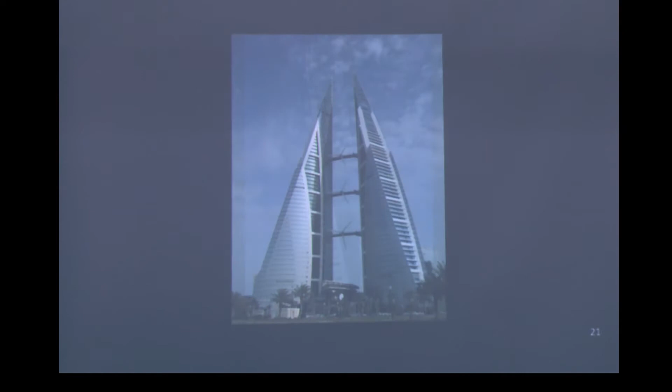But while, as mentioned earlier, our conversations are mainly focused on the condition and performance of mechanical HVAC systems because of their popularly perceived significant contribution to the current sick building issue, there are a number of other factors which require from us a more focused view with respect to the known or unknown contributions they make to the problem.

These would include building location and site planning issues, psychological impact of design quality of interior spaces, VOC emissions from materials specified and installed in built structures, dust pollutants and VOCs remaining in completed buildings as a result of construction activities, VOC emissions from various furnishing items which we bring into the buildings, lighting quality and related audio and electromagnetic emissions from light fixtures and fittings, moisture intrusion into buildings with resulting associated problems, noise emissions from various pieces of electrical and mechanical equipment installed in buildings.

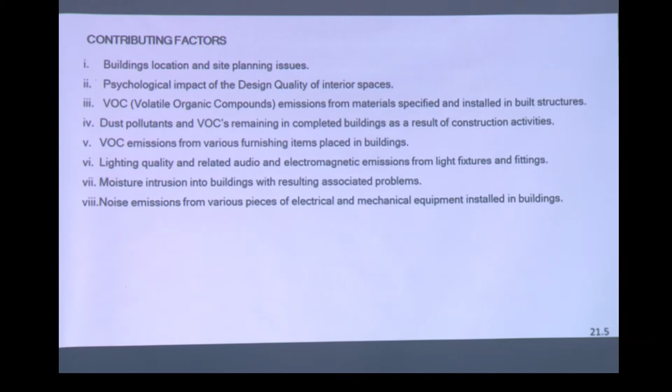What I'm trying to do here is to broaden that sort of base of what we try to talk about when we speak about environments that are not pleasant. So I'm talking more about sick buildings than about the syndrome. The building has to be sick to get to the point where you have a sick building syndrome.

Building location and site planning. These issues for concern in the early life of a building, which I call birthing pains, tend not to be given as much attention in this early stage of a project as they ought to. Sites are generally selected for every other reason except concerns for the impact of the environment that will surround them.

Naturally ventilated schools are located in close proximity to industrial plants emitting pollutants. Office buildings are located adjacent to garbage disposal sites. Hospitals are developed in areas with existing high levels of noise pollution. Sewage treatment plants are located in close proximity to tourist accommodation, and the reverse sometimes occurs.

The health issues later to be associated with these site locations are seldom given serious consideration when the sites are being selected, although it might be thought that these sorts of considerations would be high on the list of site selection criteria.

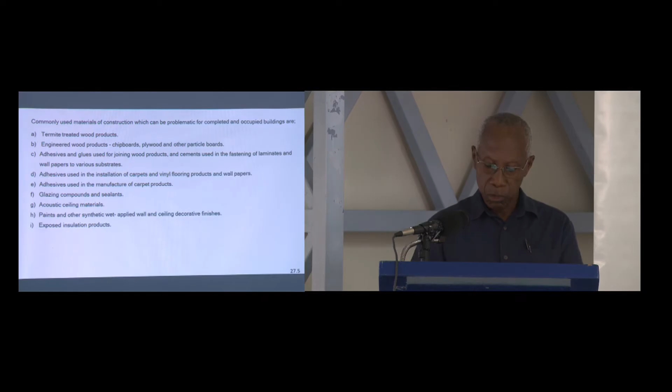As responsible architects and designers, we have to ensure that the materials we use in the construction and outfitting of buildings do not eventually release silent and invisible demons for the spatial quality of these buildings. Commonly used materials of construction which can be problematic for completed and occupied buildings are termite-treated wood products, engineered wood products, chipboards, plywood, and other particle boards, adhesives and glues used for joining wood products, and cements used in the fastening of laminates and wallpaper to various substrates.

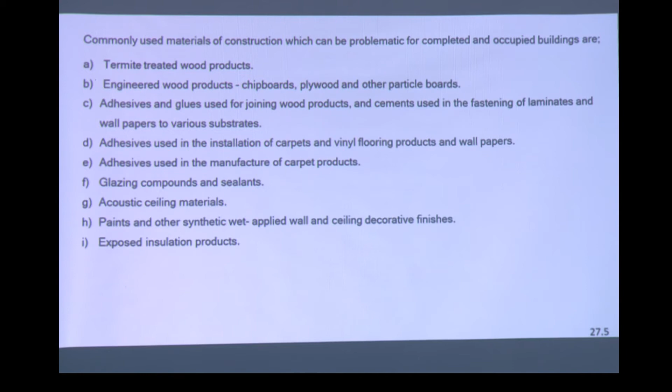Adhesives used in the installation of carpets and vinyl floor products and wallpapers. Adhesives used in the manufacture of carpet products long before they get to our installing them. Glazing compounds and sealants. Acoustic ceiling materials. Paints and other synthetic wet applied wall and ceiling decorative finishes. Exposed insulation products.

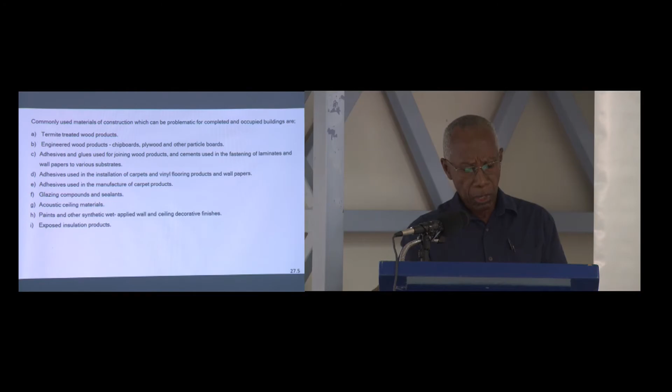Many of the problems generated by these materials and installations are usually silently released VOCs, which tend to be not immediately evident. But as architects, we are expected to be diligent in our research and in our review of the materials composition of the various products we will specify, to ensure that these silently present demons are either absent or present only in quantities below those permitted by universally recognized and accepted standards.

Some of these demons will remain lurking in the background for extended periods of time before later imposing their impact upon the users of our artificially created environments. But this possibility should not be allowed to escape our attention during product review.

Construction dust pollutants and VOCs remaining in completed buildings. During construction of buildings by traditional methods, much dust is generated by many activities, and this dust remains in spaces within the building and on various elements of the construction, which would not normally be cleaned, except the contractor has a determination to follow given specifications for cleaning, or is extremely diligent about the way he works and exhibits some pride in what he does.

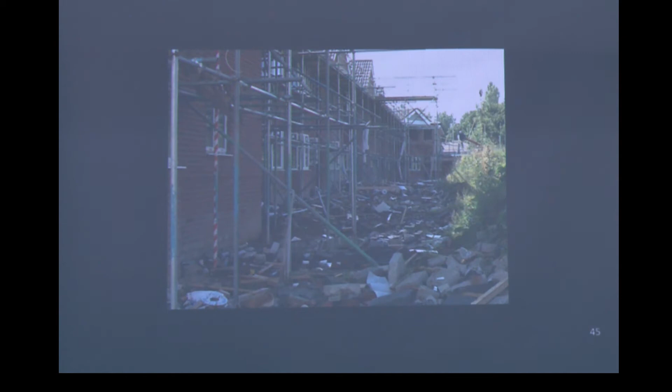Dust remains on and in all forms of that work, on the T-bar suspension systems, ceiling suspension systems, above all forms of suspended ceiling systems, and generally on all vertical and horizontal surfaces, whether exposed or hidden. This problem is generally made worse by the failure of the contractor to properly store materials being used on the job, or by inappropriate sequencing of the construction works, which causes various elements of construction to be present on the site well before they are needed for installation.

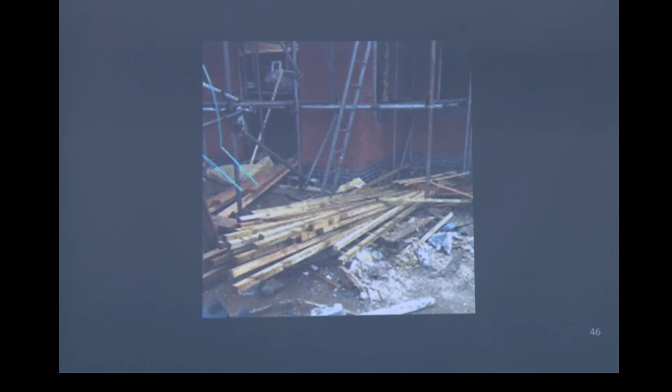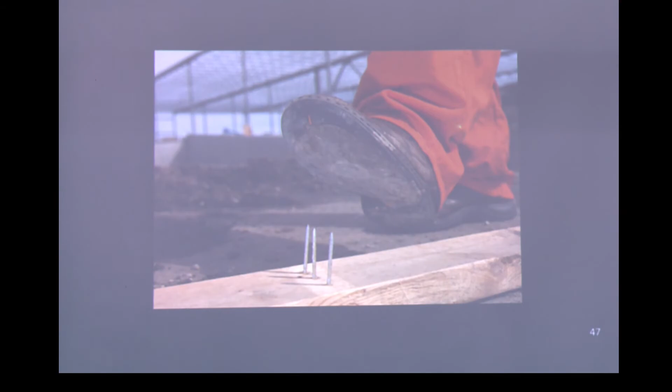The problem is worsened by the contractor's failure to carry out daily and continuous cleaning of the site, both internally and externally, to eliminate or minimize the presence of debris and dust. Other construction materials which may be responsible for the presence of VOCs in completed buildings include cleaning agents used by the contractor during various stages of the work. Various adhesives and glues routinely used in plumbing and carpentry and joinery installations. Various retarding and hardening concrete additives. Cleaning agents used in the final cleanup of the building before handover.

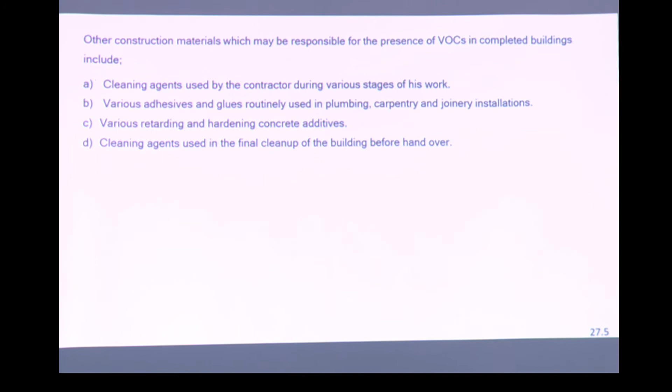The impact of many of these chemicals is seldom given any serious consideration and may tend to slip into the realm of not so important issues, particularly as the project comes to completion. As an example, the contractor generally subcontracts the final cleaning of the building to specialist agencies outside of his total control. And this can sometimes lead to the introduction of dangerous cleaning chemicals into the building's environment at the worst moment, because soon after handover, there's an invasion of occupancy. So unless there is a stringent adherence to a stringent cleaning specification forming part of the contractor's contract, these could become real issues.

VOC emissions from various loose furnishings items placed in the building. Once various loose furnishing items are brought into a building to outfit the building for use, VOC emissions similar to those described earlier as being present during construction add further dimensions to the problem. All of our concerns about adhesives and glues and materials composition resurface and need to be given the same attention as at the building construction stage.